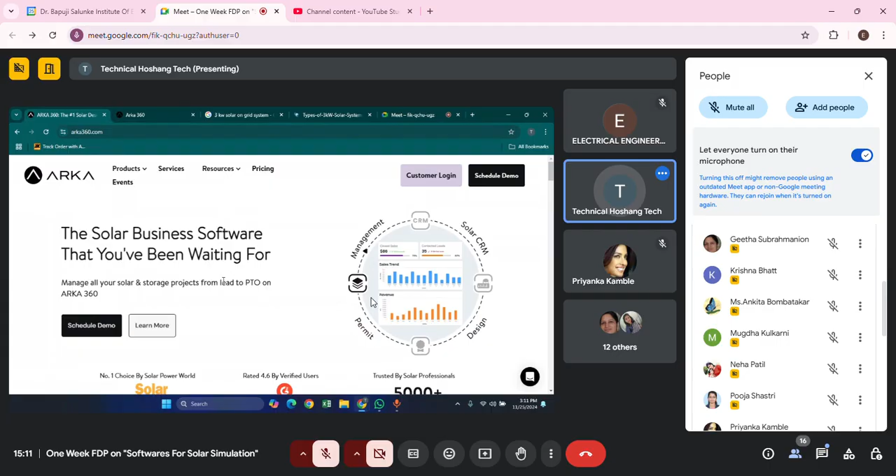Yes. So for this first session, we will just have an introductory part of the Solar Lab software. This is basically Arka 360, which is the design point of view. The Solar Labs is the marketing point of view for this website. This is a Chrome-based software through which you can design, analyze, permit, and manage all your solar plants. You can have a thorough analysis.

You can design a solar plant in all ways. You can try all the permutation combinations for your solar plant. This software helps us gain thorough knowledge and see the optimal generation, optimal losses, optimal everything. You can try various sorts of solar panels, inverters, wires, solar angles, and sets of solar panels, and see if your solar space is easily accessible.

Solar is an investment, and from that point of view the investment is quite high. So you can check if whatever you invest in the initial period will give you an ample amount of solar light, generation, and accessibility, so that you will be generating a lot more power.

So first I'll clear what these three types of solar systems are. Normally, in a lot of houses you will see an on-grid solar system. Does anyone of you know more about solar systems, or the basics of these systems? Or have you installed solar systems in your home? Yes.

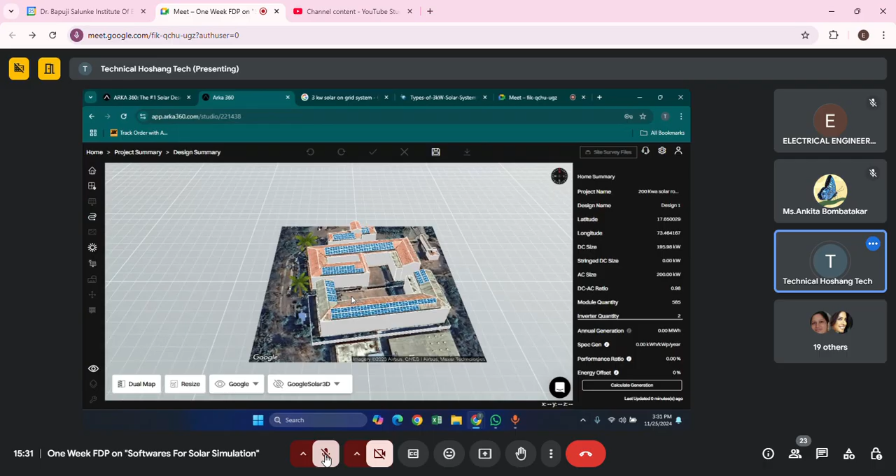We have almost 670 panels installed on our total roof side. So this is our college entrance this way. Then this is A wing, this is B wing, and this is C wing. So this totally contributes to almost 240 kilowatt. We upgraded it by 40 kilowatt later, but here you will see up to 195 kilowatt on the DC side, and on the AC side you will have 200 kilowatt installed. On this side you will have the total summary of the solar plant.

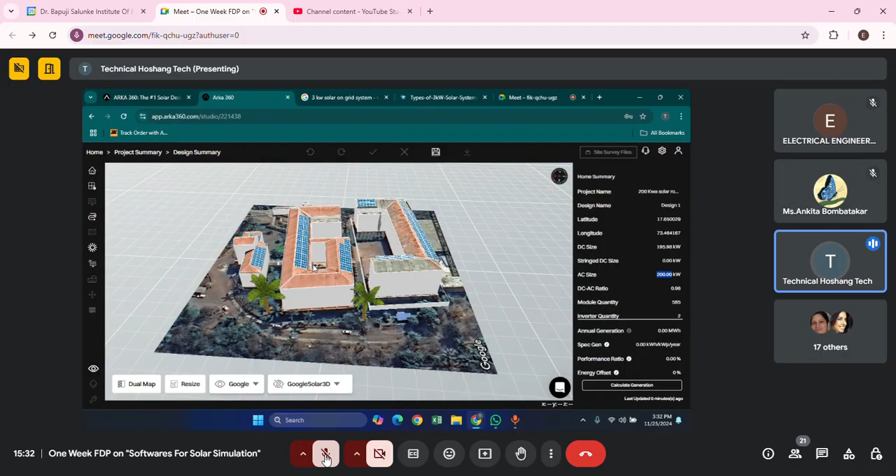So we have a separate inverter installed for this wing, and a separate inverter installed here for these two wings. While designing a solar system, you have to design solar panels in such a way that it is optimum in space, using all the available space on each roof side, with less losses. Next, this length is almost 35 to 40 meters. So the 40 meters length you have to design in such a way that you use less wires.

In DC supply, whatever generation you do, if you need to take it a distance, then you will have voltage drop because it doesn't have frequency, right? So you have to design your system to place the inverter as close as possible to all the solar strings, and you can take AC supply up to 100 to 200 meters with less losses. But for DC supply, you have to design the plant so that you place the inverters at such height. I mean, these together contribute to one single table.

So these two terminals, when we connect these 18 panels in series, a single wire will be running together and directly be connected to the inverter. So you have to design in such a way that you will use less wire and cover less distance.

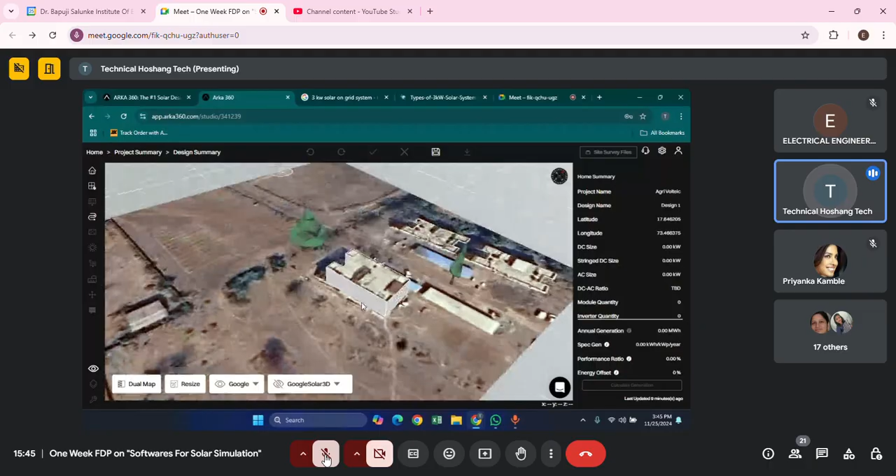This represents the building angle, at what angle the building is, and because we have a clear-cut installation of the roof, we need to change the angle of the building. Then this is the parapet height, and this is the setback, whatever setback you need. We'll hit update, and then if you go to a 3D view, you will have a flat roof ready for your solar design.

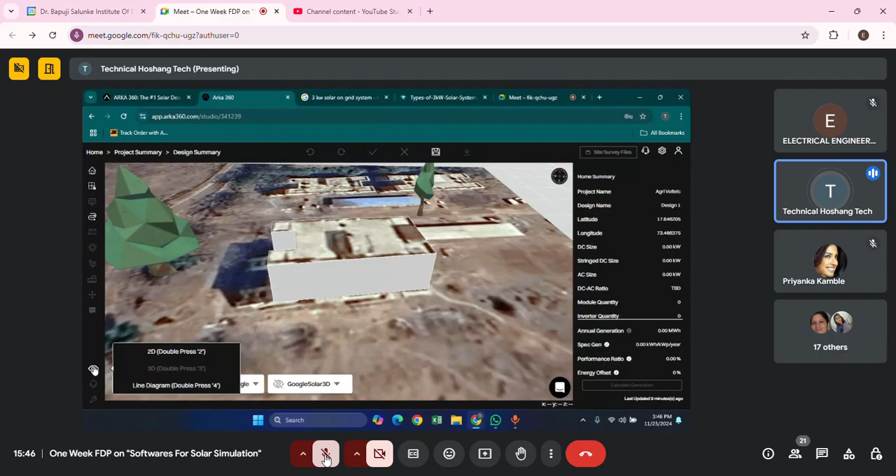So now what we have is the depth area like this, which we have neglected, right? And this is the access roof, right? So now we will design this roof access here. Now we'll go into obstruction, then we'll select it as a rectangle. Okay, then we'll roughly select the area. We'll go into model, we will have a flat roof.

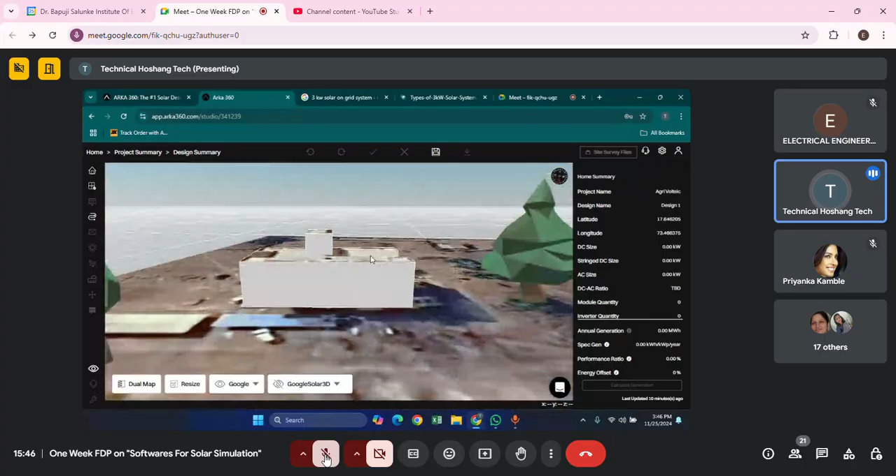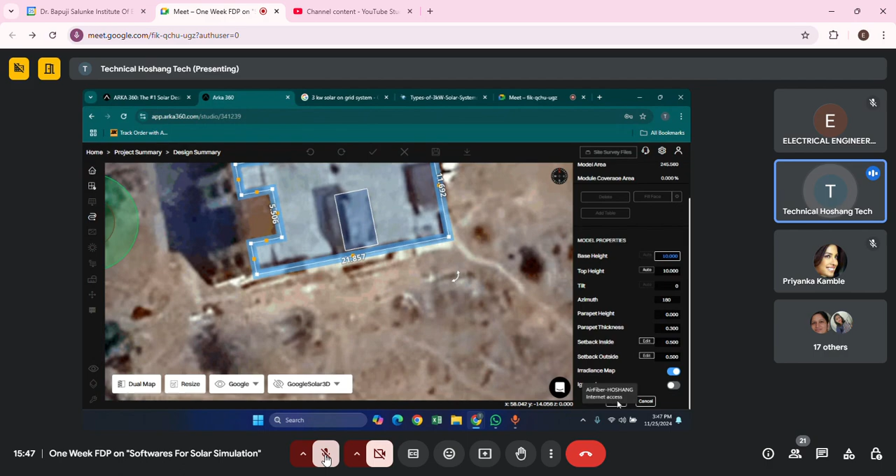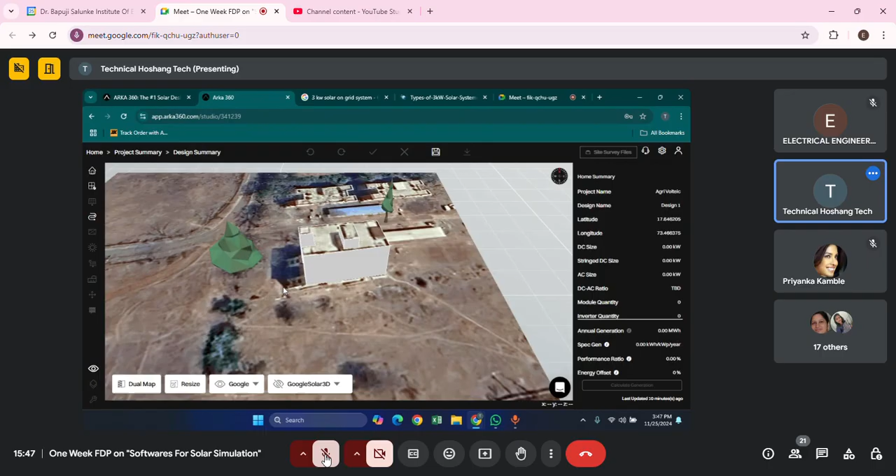And give it a base height of 3 meters. And now if we see it in a 3D view, you will have the roof access at 3 meters. Okay, the total height which we have set here is 6 meters, and this is 3 meters. You will see a depth here. Okay, so you can increase this height. I am increasing it to 10 meters. Okay. So this is what a flat roof looks like. Is it clear? This is the basic system.

So the next thing we will do is we will have a pitched roof design over here. While designing a pitched roof, you will have different types of shapes. So you can have an approximate length. Okay, so this is what a pitched roof looks like. We'll change its base height. We'll hit update, and then we'll go to 3D view. Okay, this height you can change.

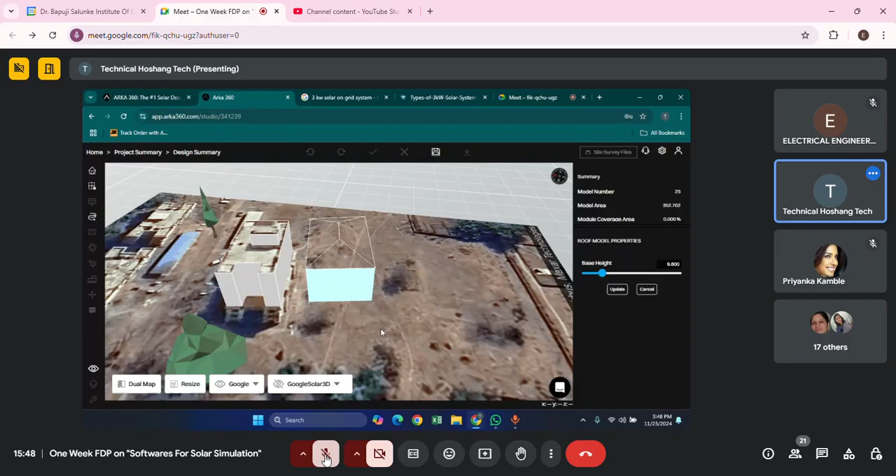So this will replicate the same pitch angle, and also you will see its direction, north side up, south side down. So we have this available space for solar installation. If the roof is not that way, then you can design it in other ways also. You can change these distances and have more solar access, or whatever the space is, you can calculate it and design your pitched roof so that you have an optimal shape available for solar access.

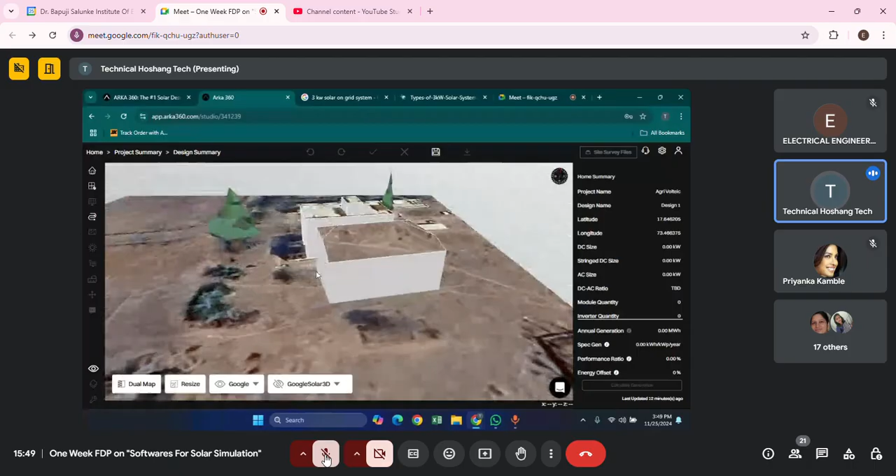So again, when you go to 3D view, you will have its design. Why I am doing this is so you can install a lot more solar panels. You can try various ways. So I'm just manipulating the design. Whatever building type you have, you can design it in such a way. Okay. So then another thing you have

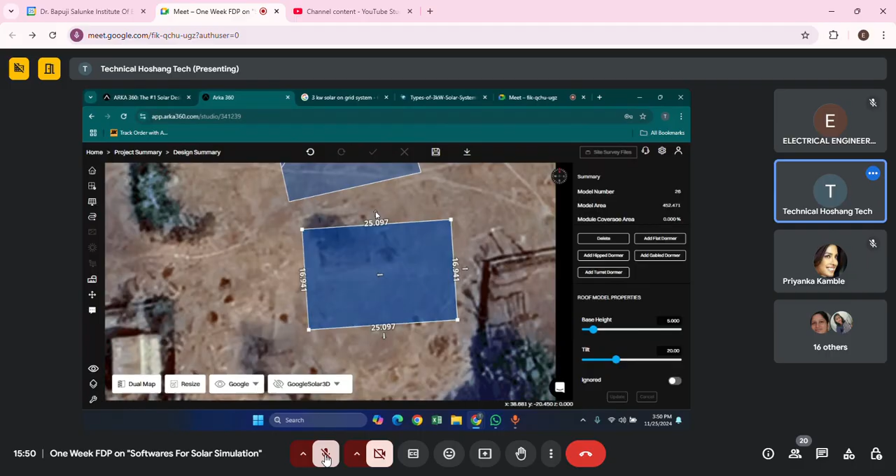is a one side. So this represents a normal industrial design, or this is a complete flat roof shed. Okay, so for these shapes and sizes you can increase the base height, and also you can update the design in other ways. Basically these three types of roof designs you can have, and also you have to tilt the angle so that it is solar accessible.

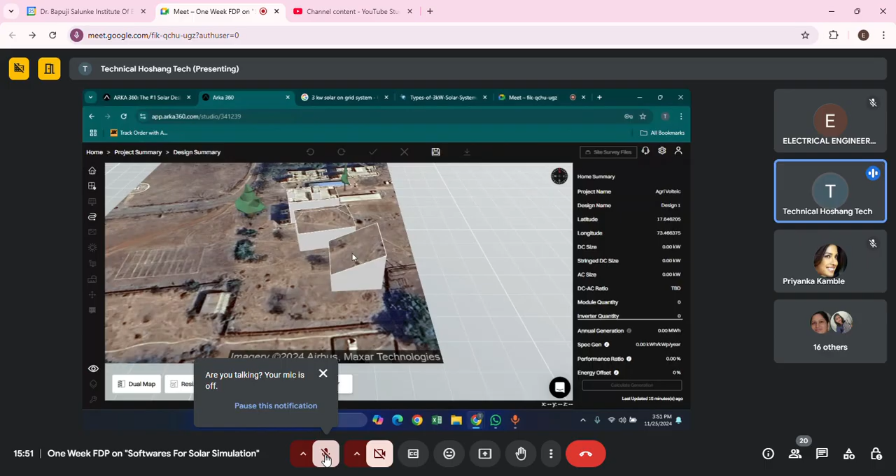The tilt angle is set at about 20 degrees because it is the optimal solar generation angle for our latitude and longitude. So this tilt angle is calculated through our latitude and longitude. So let us keep it at 20 degrees. Okay. So these are basically three types of roofs which we can use for designing.

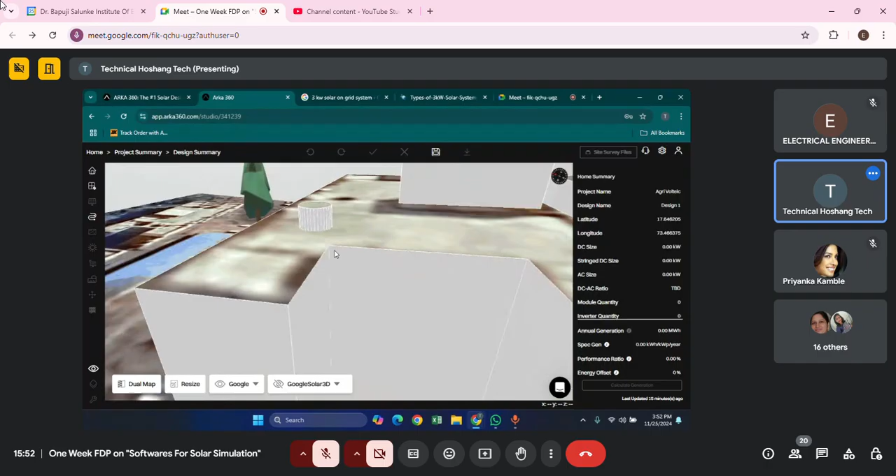A lot more things we need to learn while designing roofs are the actual structures used, because if you have several types of obstructions, let's say cylindrical, then you have to select it this way, and then you can see it in a 3D view. So different types of panels, air vents, obstructions, whatever are there, you can use these things for. Also, from a safety point of view, you can have safety lines. You can also have handrails.

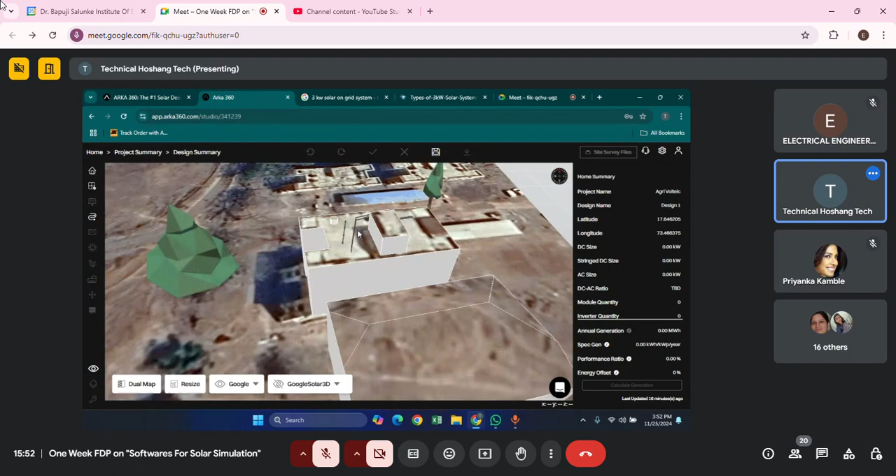Also you can have a walkway, and also you can have the various types of trees we have seen, right? These are several types of safety lines. This is a safety line, this is a handrail, and this is a walkway. This software has almost a machine learning function, so it replicates almost everything.

You can modify the walkways by changing their length, core height, and width. Also for handrails, you can change the core height, and this height is represented in meters. Okay, and you can do various other things.

So basically this represents what type of roofs we are going to design. In obstructions you have different types of obstructions you have seen. The next is module. So in module you can see add a sub array. So this represents the solar installation. Now we will turn on to solar installation.

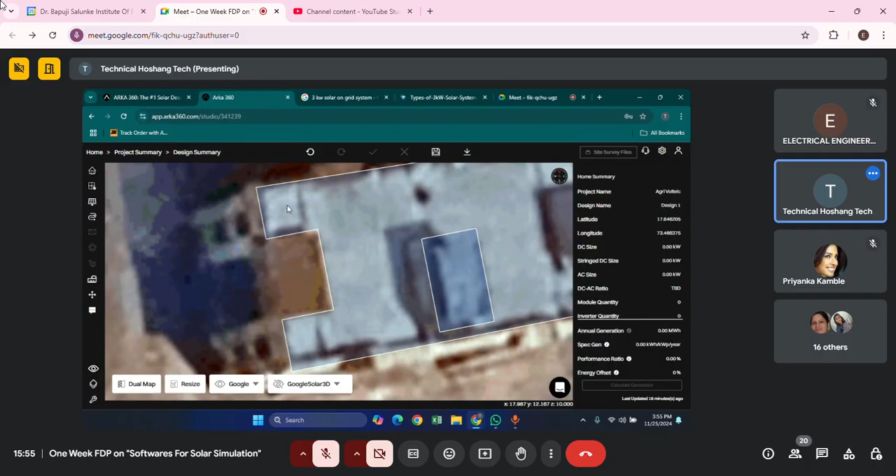You have the sub array, you have module delete mode and add a table mode. These three options. So we have to select the sub array. We have to give the software the available area, whatever available area we have. This is the top side of the building. So what we'll do is we'll again select the module area.

Okay, so when you select the area, the system calculates the available space and it installs the solar panels directly, with directions in mind, at the maximum amount of solar panels in the available space. So this is system generated. It is directly designed by the system. The length and breadth of the solar panels is already installed. The system knows whichever solar panels you have.

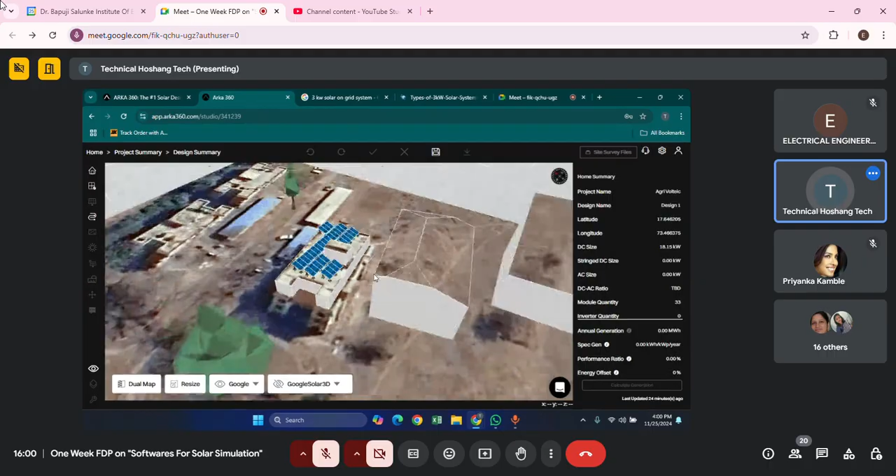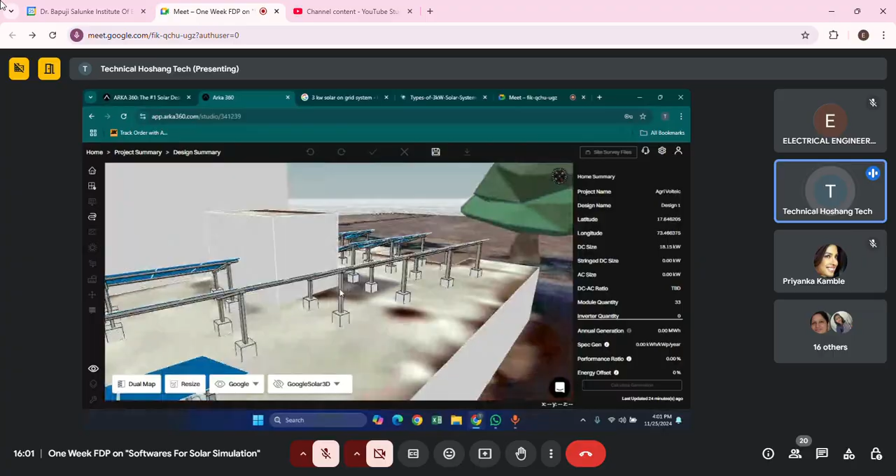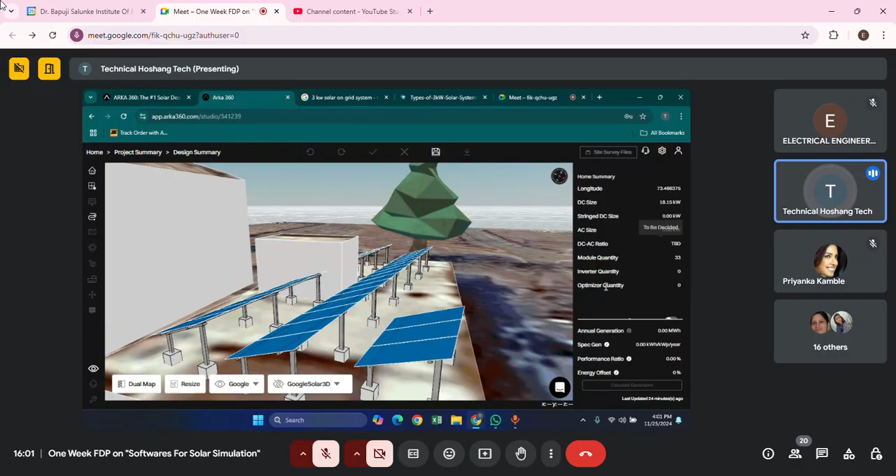While installing, if you want to see it in a 3D view, you can see the different types of structures. Now we have not specifically designed a table, right? So each panel is having its own structure here. This is a simple design, a 4-leg structure. You can have different types of structures in this, and you also have the continuous ongoing summary, DC size, AC size, DC-AC ratio and everything.

Okay. So while designing a solar system, we have to design it in such a way that you keep in mind where you will install your inverter. So if we consider this type of flat roof in a simple building, a 2 or 3 story building, this is the best place where we can install the inverter. It will be waterproof inside this area. Let me see.

Here is the entrance, right? So it will be completely waterproof, and it will be a lot safer. We can connect all these panels. You will have less wire requirement, and we can install it here. So this is the optimum space for connection of the inverter.

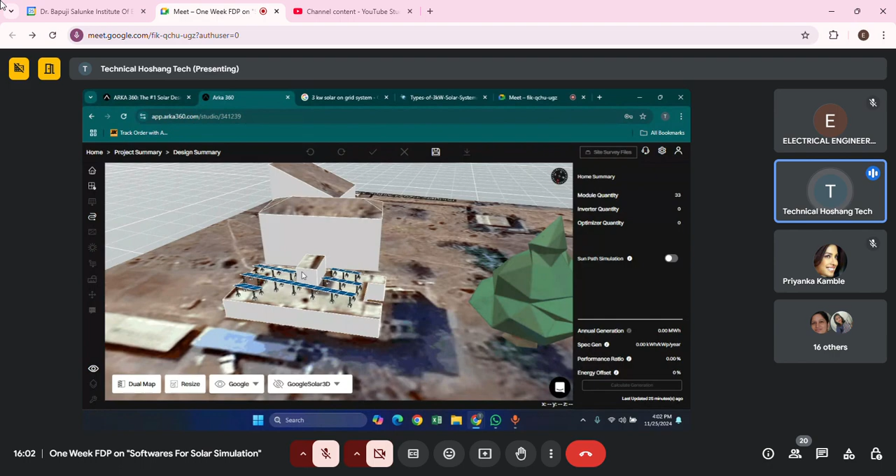While installing and while designing, we can also change various solar angles. Okay. If we consider the south facing, then we can change it to 171 degrees and update the design. Then it completely aligns with the available roof angle and available building design. Okay.

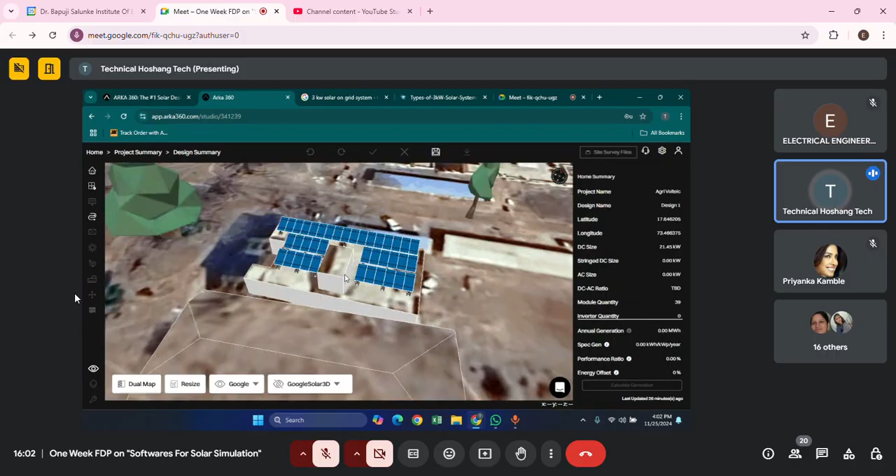So this is perfectly set up by the software, and this system, if you see, is almost shadow free. Each panel will have its own solar access. The system will specifically have the space required for solar access, so there will be no shadow of this structure coming on the panel, this side and this side. Okay, so this is how you can change different types of angles.

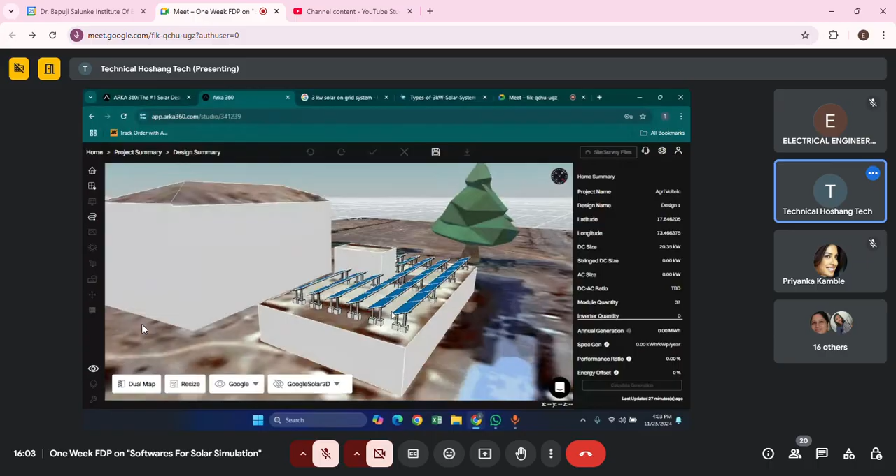You can also change the angles from latitude to longitudinal. Okay, portrait to landscape. You can try various structures, various angles, various types of solar panels. Still, you can see if we put the panels on the longitudinal side, you will have an increase in the number of solar panels, which will go up to 20 kilowatt. Okay, so the system is updating.

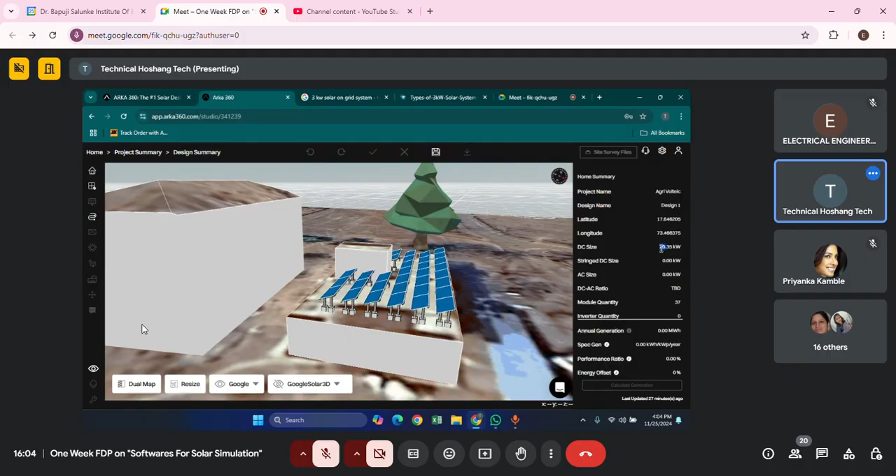Hello, am I audible? Okay.

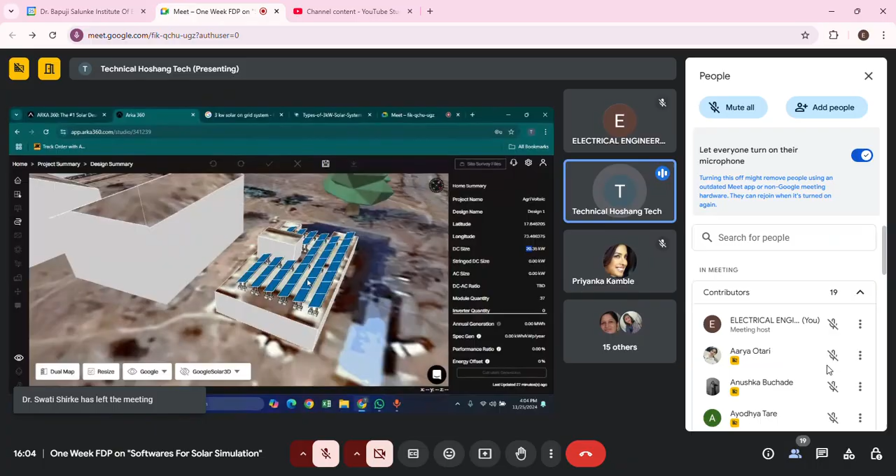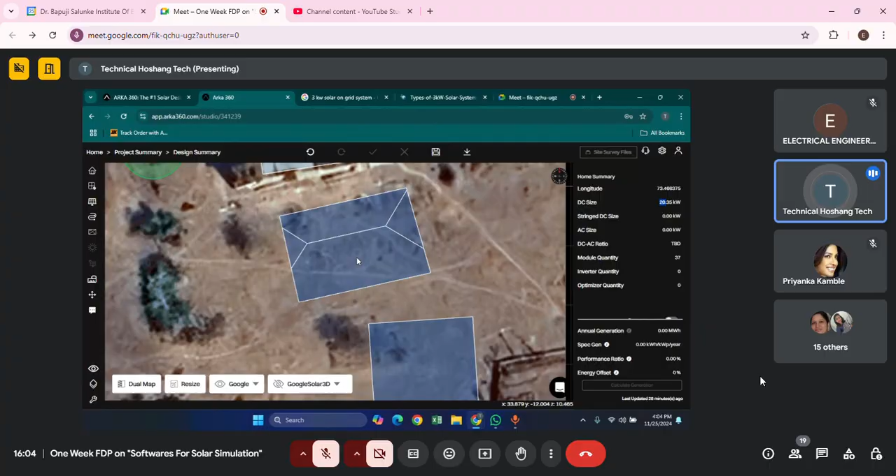So you have various shapes and sizes for solar panels. You can use various shapes, various solar panels, and design your system. If we need to design the solar panels for, let's say, a pitched roof, you'll do the same thing. We will have a module. We will add a sub array. We will give the system the available shape, whichever is there.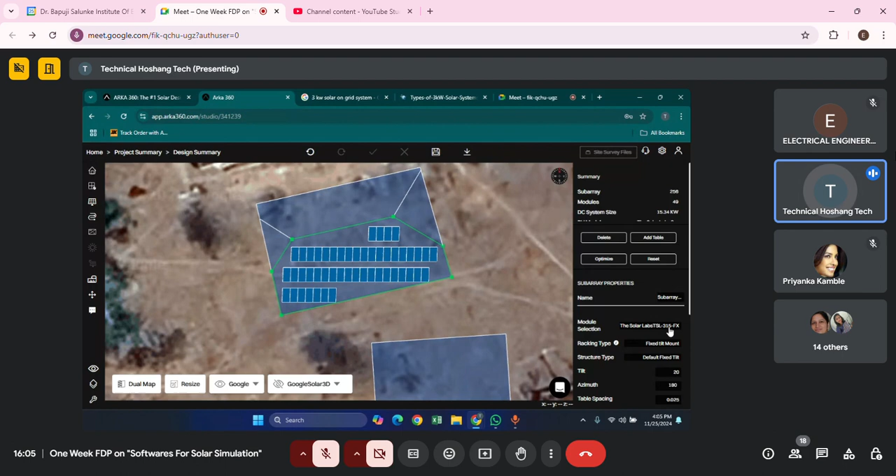And the system will directly install a number of solar panels. Basically the lower wattage currently being used in solar is almost 315 watt, or else you can go to 330, 335 watt. So the system detects the minimum solar panels being used. You can change them to whatever size you need, or whatever maximum wattage you want to use.

Let me see if the software has 720, which Waaree has currently introduced. Yes, they have 720 watt panels from several companies. So you can also use this type of panels. You can see the data sheet of the solar panels; it has directly been downloaded now. You can use various top companies, various types of panels.

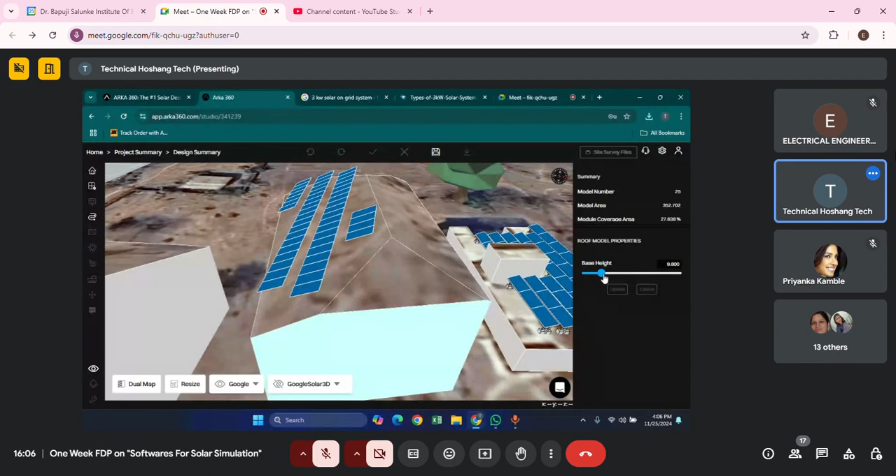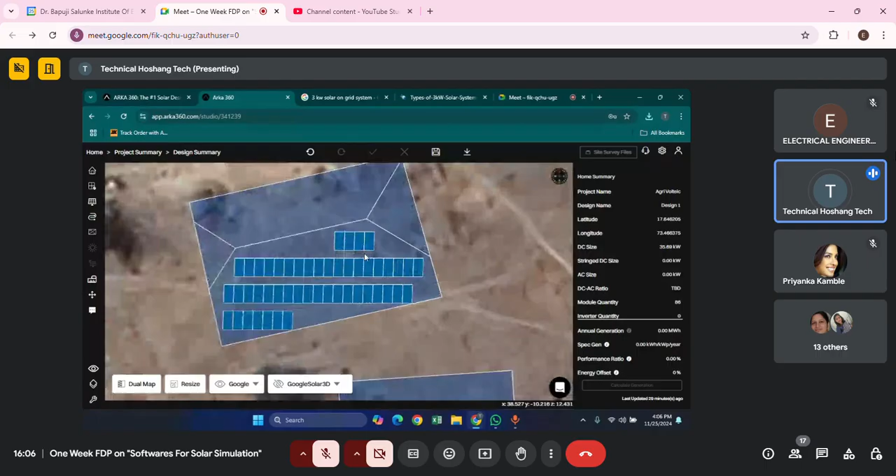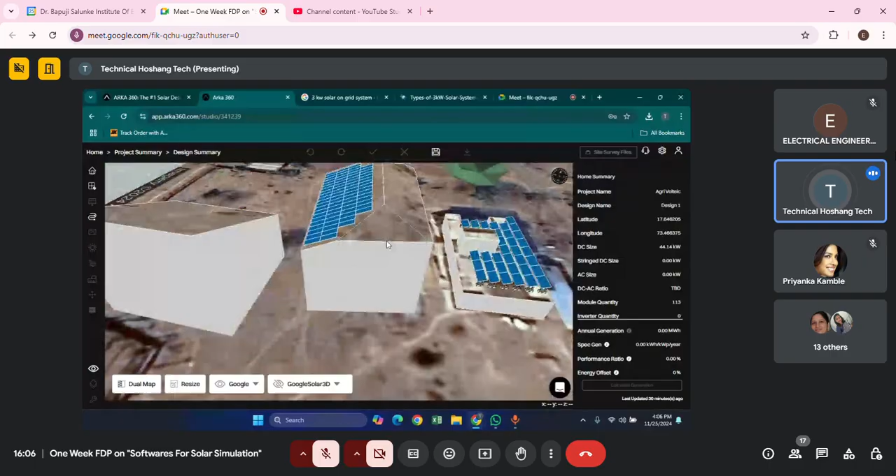Then you have different types; this is a shed type of structure, right? So you can see how the solar system on a shed looks. These are basically simply stacked on this smooth surface. Okay. Solar structure for shed, solar structure for flat roof: for each, the metal structure changes. This is the optimum structure we can have for a shed type, this way.

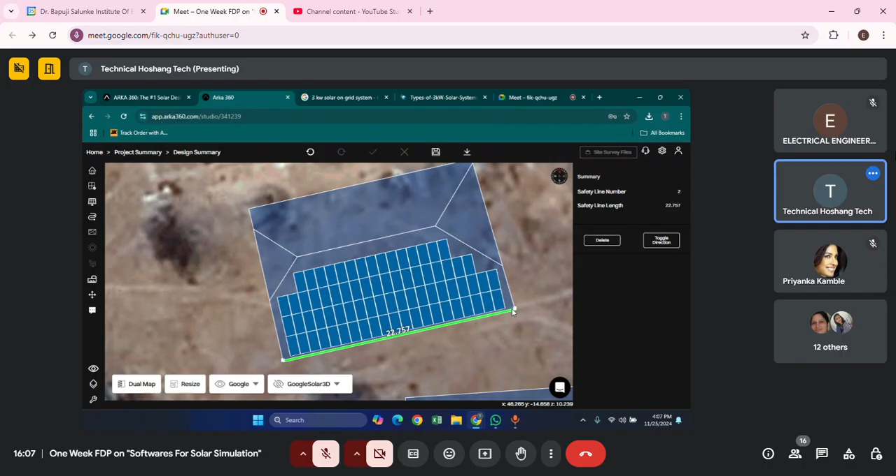Okay, so one thing is you have not designed this. You have not installed a walkway. You have not installed railing. These are important things which you need to have. You can have a safety line from this point to this point. Also, you can have a walkway.

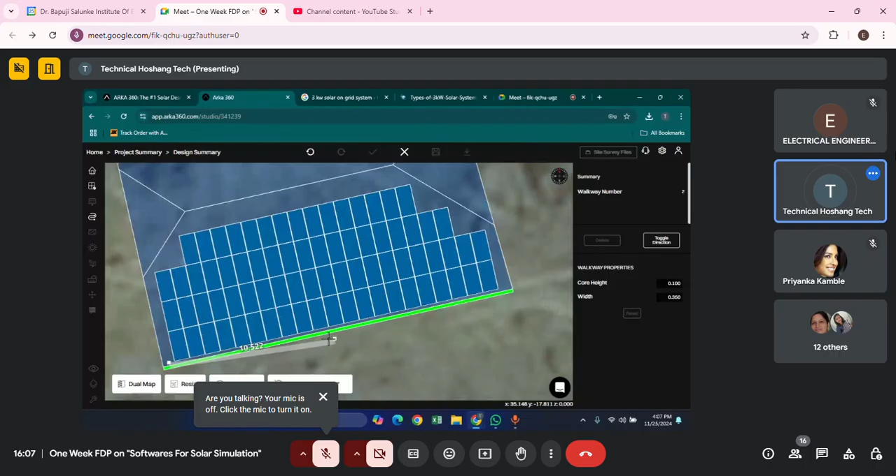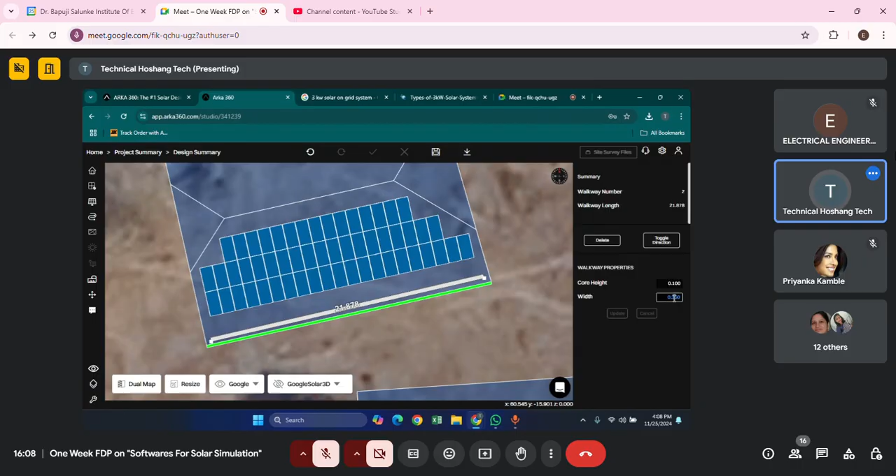So when you design a walkway, the available space reduces and the panels get deleted. Okay, let me decrease the width. And when we go to 3D view, you will have a handrail, in the sense of a safety line, directly at the lower side, and a walkway designed here. This will be very helpful for maintenance.

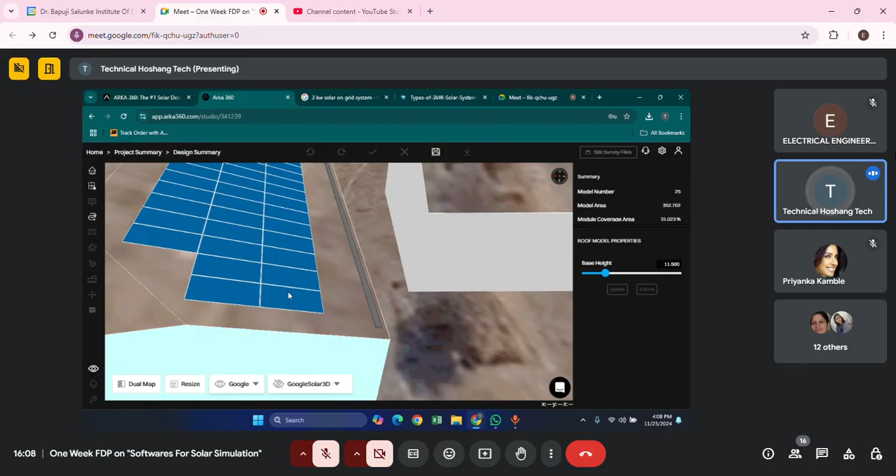So this type of design you can do for a shed, and then we'll do the same thing for... now I am trying to add the subarray again. We have changed the roof angle again.

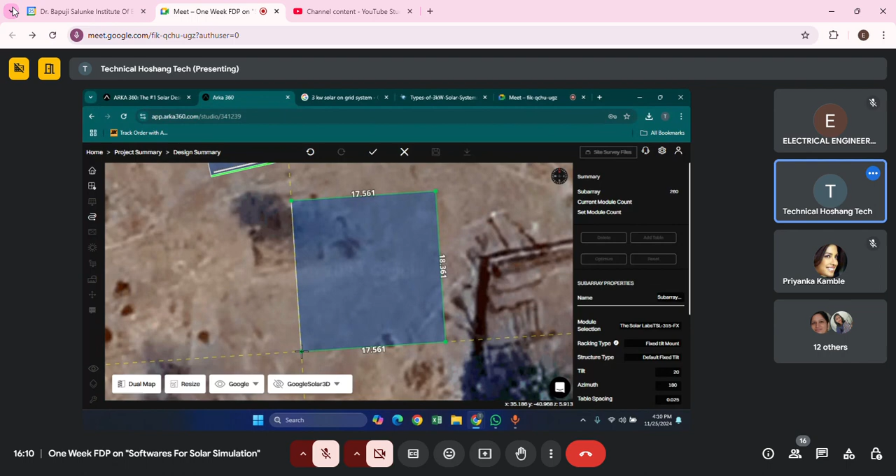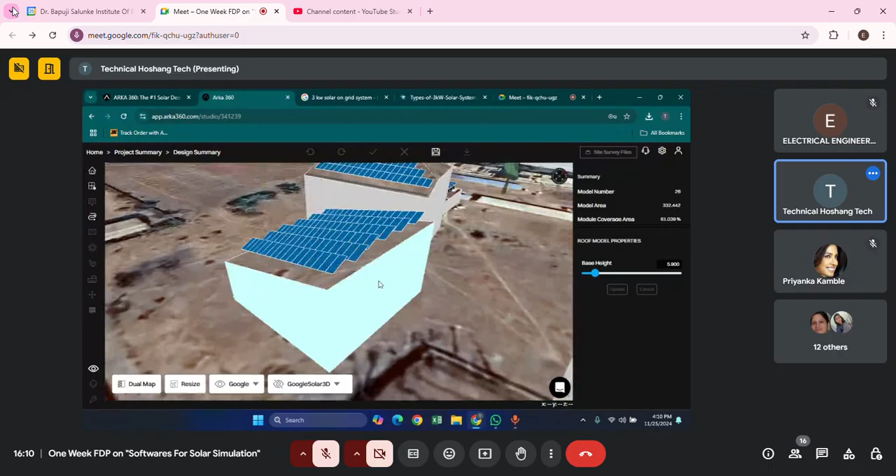So this is how a shed with a different angle will look like. There is no structure given in it. So what you can do is you can change the structure. Click update, and then we'll go for a 3D view.

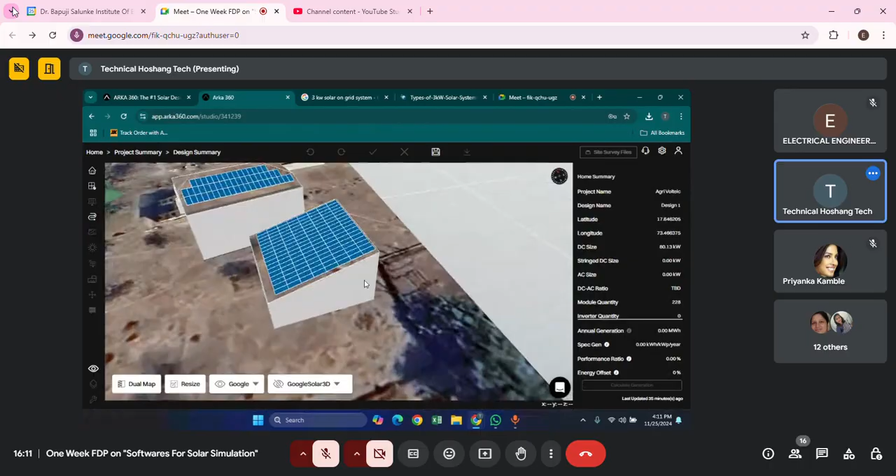While designing for a flat roof, you try several designs from a structure point of view. Fixed tilt is okay. We have this type of structure. We will do it portrait. Angle is okay, and update. And if we move to 3D view, this is a 4-leg structure.

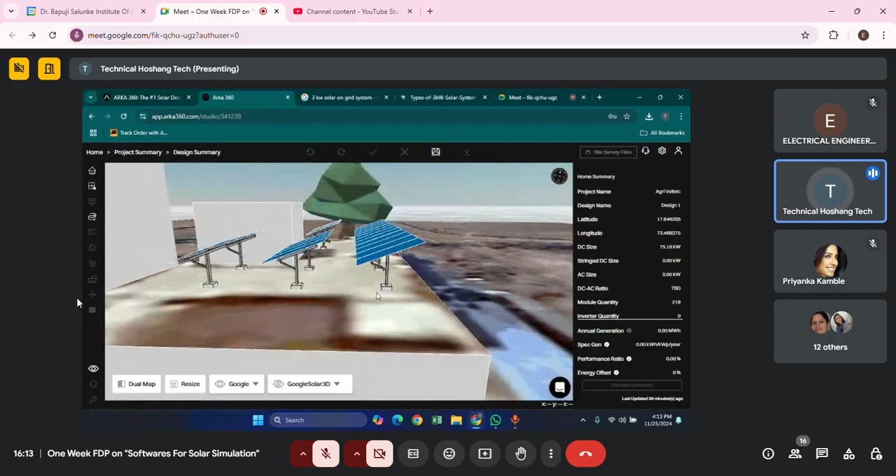This is a single leg structure, which is used for water pumps or in various ways. At parkings also you can see this type of structure. So various types of structures you can try. Also, there is a way where you can have a table structure.

Okay, you have to select the subarray, which completely selects all these panels. Then we have to have the number of rows. Let me put it as 3, and columns, let me have it as 4, and update. Then you have the specific 3 rows, 4 columns, in the available space.

Okay, and then if you go to the structural angle, you see that you cannot have it as a single leg, so we need to change the structure to a 4 leg structure for the sub array, and we will change it to... got it.

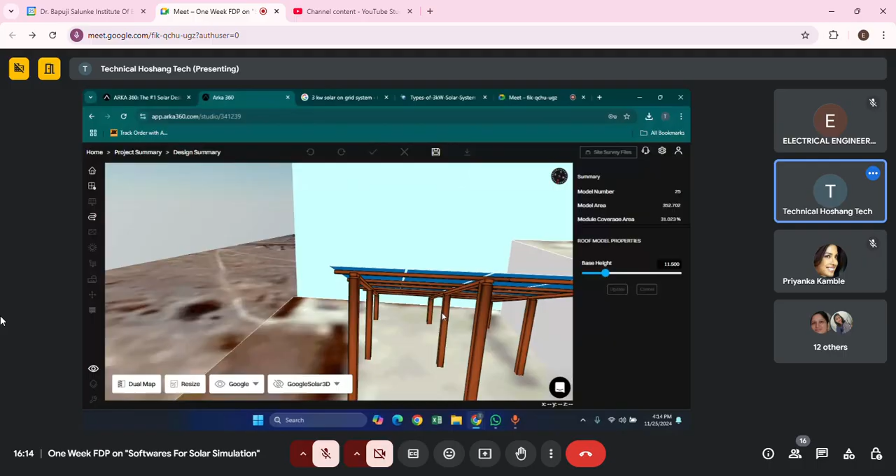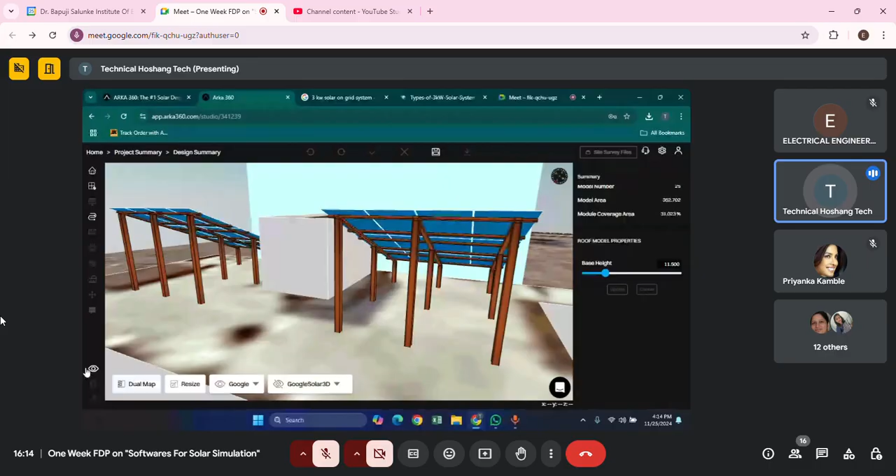The other advancement is if you get the structure weight in kgs, then it will be very useful to design and to procure the material required. You can see the length, you can have the actual whole dimensions, whatever a panel has, and you can see the structure together. And also you will have the total solar generation quantity also.

So now whatever we have created together is almost 72 kilowatt total. And if we delete all these things, then we will have it as a single one, right? So do you have any doubts regarding this thing?

Yes. Wiring and cabling, you will have it? No, you don't have it in the design, but you have a calculator where you can put the distances of the solar panels and you get the total length.

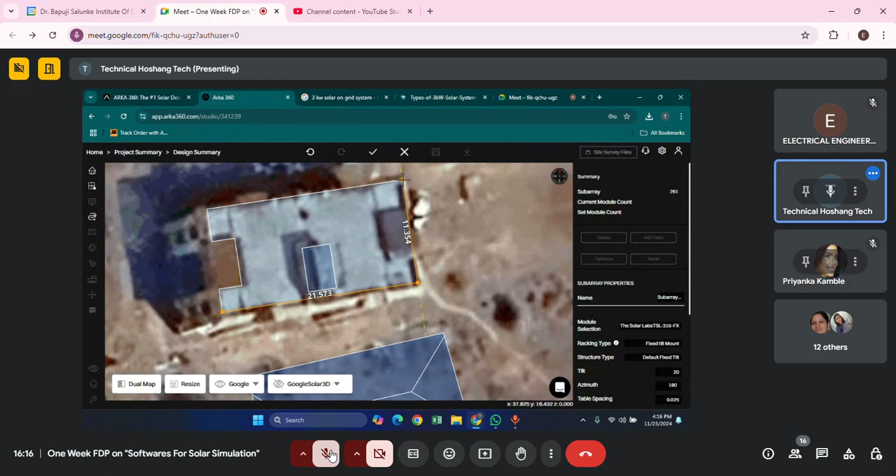Basically, what this software does is you give it the specific areas. You design whatever obstructions you have, and then the system decides whatever optimal generation you can do in the regulated space. So if I delete this panel, I delete these things, I try to add a sub array again. To have a maximum output generation, you have to just select the area.

And then you have to select a sub array, and you have to just change the south facing angle to 171 degrees. So this is what optimal solar panels will look like. Then what comes is how many panels will be connected in series together to form a string. So it depends on, let's say, the system we have designed is almost 15 kilowatt.

So for 15 kilowatt we have to see the rated solar input voltage and current, and we have to see the rated voltage of the panel. For a 315 watt panel, the rated voltage will be almost 36 volts per panel. So you have to match 36 volts to whatever the rated input voltage is for the inverter, and you have to stack all these panels together to form a table.

Let's say whatever I have shown here, a single row and single column, you can change. You can change the rows and columns also, 2 by 2. So here you can connect all these 8 panels, let's say 4 up 4 down, together, and connect the voltage directly to the inverter. So in various ways you can design the solar panel and optimize it.

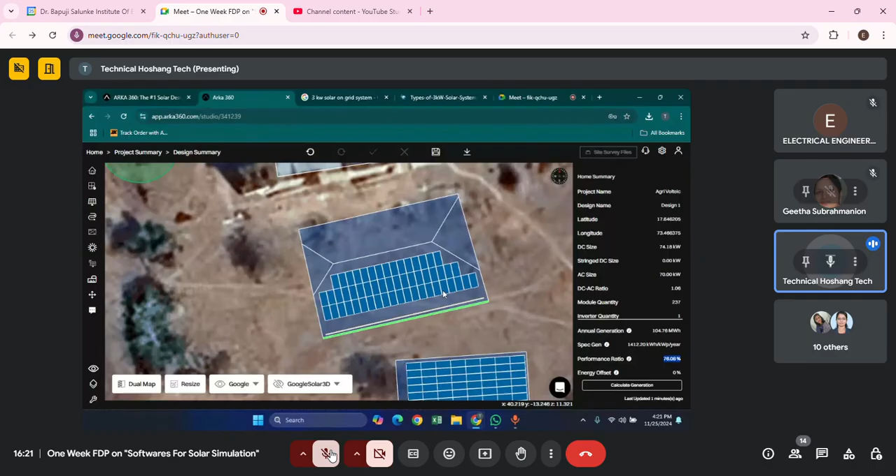The number of solar panels is also more, and we have less space gone outside here and there. So it is an optimum space. So 76% is the performance ratio. So when you generate and save the design, then you get a design summary which you can have and which you can export.

When you have a proper design, then you get a proper design summary. So what will be the total generation? Then what will be the solar analysis, loss analysis, global incidence, shading, soiling loss factor, all these losses you will have, whatever percentage they are. Then you have the bill of materials: premium walkway, safety lines, inverter of so many kilowatts. So a report will be generated directly.

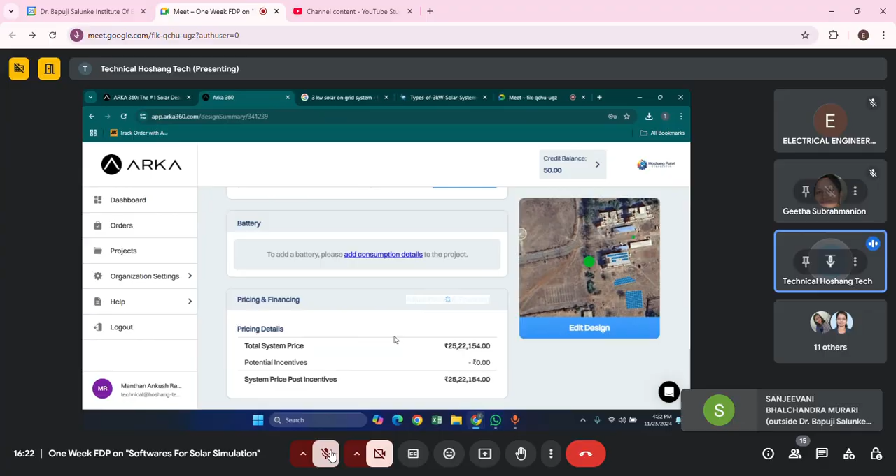Batteries: they have considered an on-grid system, so there are no batteries there. And pricing and financing you can add from your point of view. Let's say you are having it for 34 rupees, then the total estimated cost for 74 kilowatt will be this much. You can have advanced pricing, discounts and everything, and then you will have the total estimate which you can share with your customer. Also you can document your proposal in a proper format.

So when you scan, you will have a 3D view of this project. This is almost 74 kilowatt. This is the basic rail we have added. And you have a company overview. When you add it, you will have it here. Then this is annual generation and performance ratio. A clear-cut report is generated from this software, from this website.

So this is a subscription-based website which has cost us almost 76,000 per year. Recently our subscription has ended. So we can't do new projects, but we can edit our old projects as many times as we want. If you have the components, you have expected annual production from your solar plants. You have a monthly table: effective DC energy, AC energy, specific generation and performance ratio.

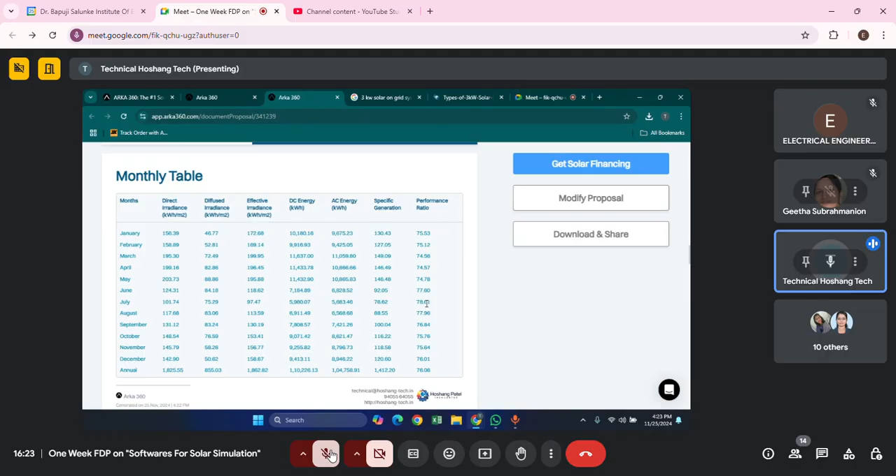So if we study the performance ratio, we have 78% in July. This is where you have optimum sunlight suitable for solar panels. If you have maximum solar intensity, the heat generation is high, and when heat generation is high, you are unable to get the electrical energy at the output. So optimum you have it at 78, and in November also you will have optimum generation.

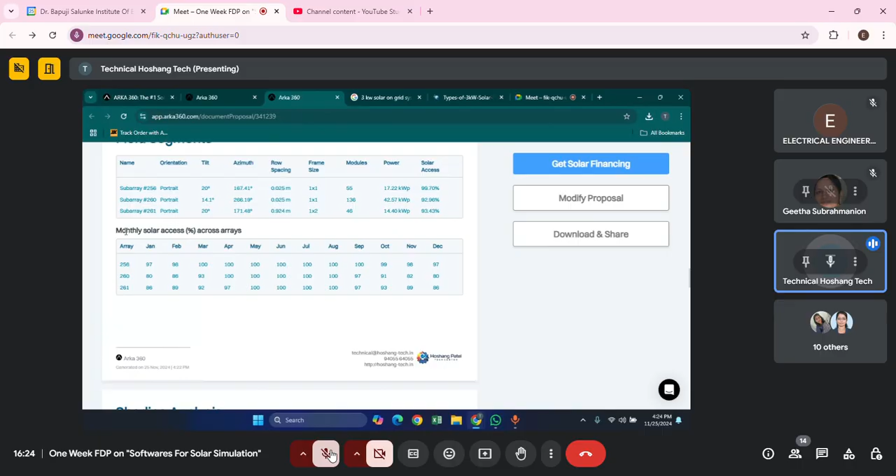You have different types of tilt angles. You have solar access and everything. You get all the shadow analysis reports generated by the system. You get the map. This we can also do in the design. I'll show it to you tomorrow.

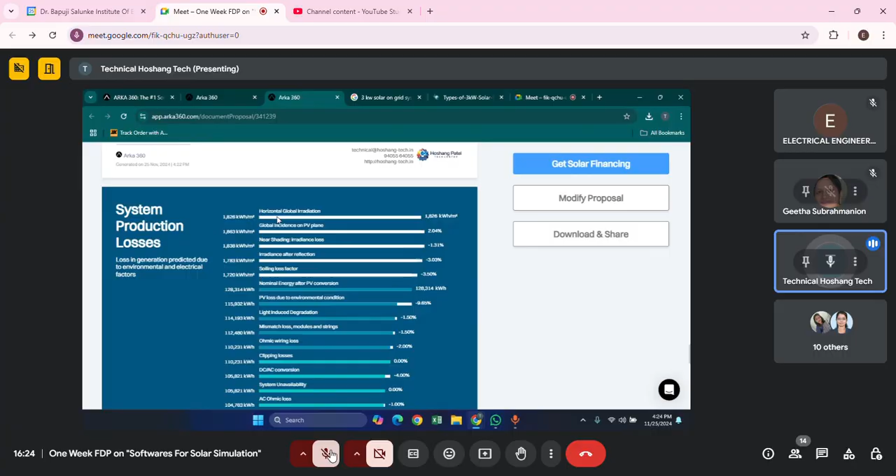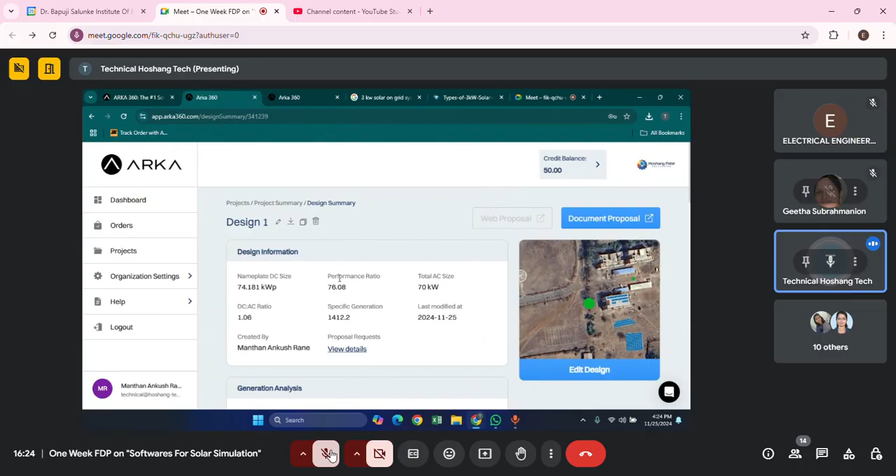Then production losses, environmental impact, carbon dioxide offsets, equivalent acres of deforestation, coal burned, you will have. All these things you can have with a documented total proposal. You can download it, share it, and also finance it and a lot more things. So this is a basic overview of the software, how you can make several designs. You can try several types of panels.

So tomorrow we'll work out a specific building, from start to end. Today I have shown you small things, all the parameters in an introductory way. So tomorrow we can design any building in a proper start-to-end way, where you can have your own generation report and a clear-cut design, so that it is very helpful.

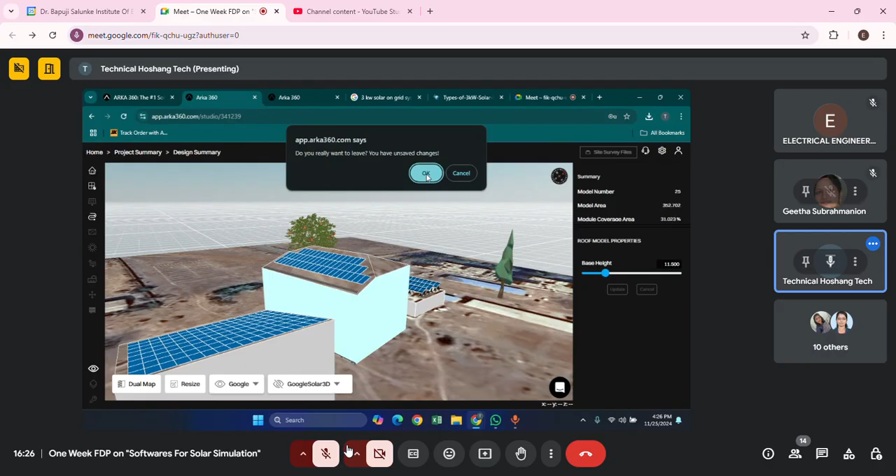So tomorrow we will have a single building. Let's say this is a 2 megawatt solar plant which we are designing for Garda Chemicals Limited. And we also have one plant for our Garda college, that I have shown you already. The actual number of panels, the actual number of wires, this is what you can do.